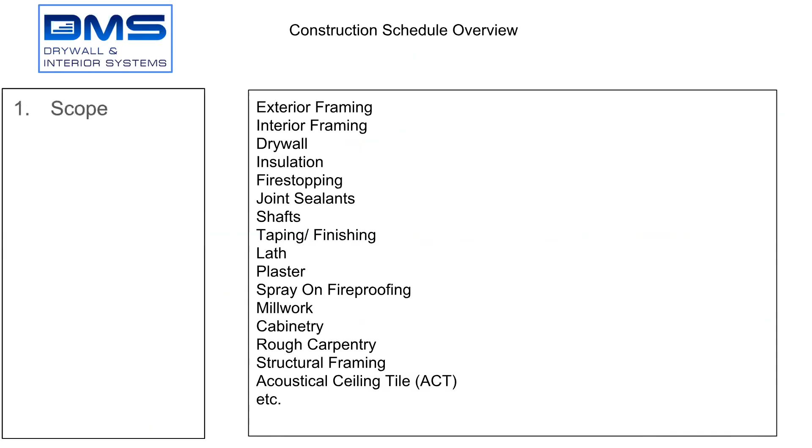So we're just focusing in on interior framing, drywall, taping, and finishing today. From there, everything else follows the same path, just some gets more elaborate. It all depends on the project, because each project's a little bit different. So first thing you look at is scope.

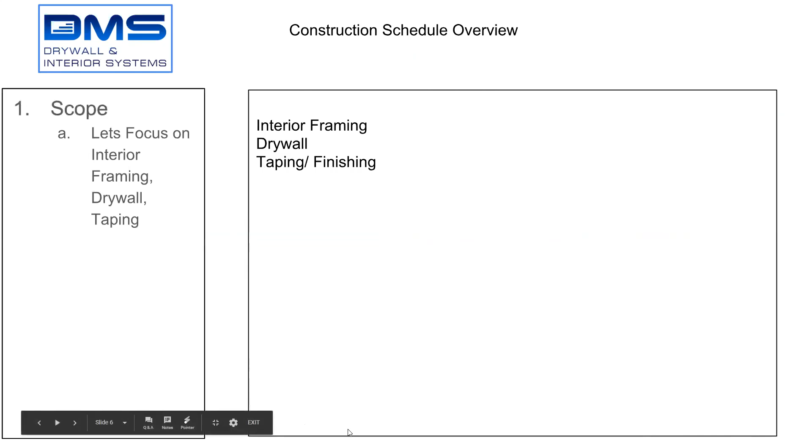Next piece you're going to look at on your project: how is your project broken down? How is it set up? Is there area or phasing in it? Are you going to go first floor, second floor, third floor, or are you going to go third floor and then come back down to 1 and 2?

In San Francisco, there's not a lot of extra area to lay down material, so we'll usually build from the second or third floor up and leave the bottom floor to get materials in, because there's nowhere to stick it. You use that area underneath, feed it up through, and then do that part last. So knowing how your building is going to be put together in sequence, or if there's areas or phasing, is important. In this example, CPMC Davies South Tower has a phasing plan.

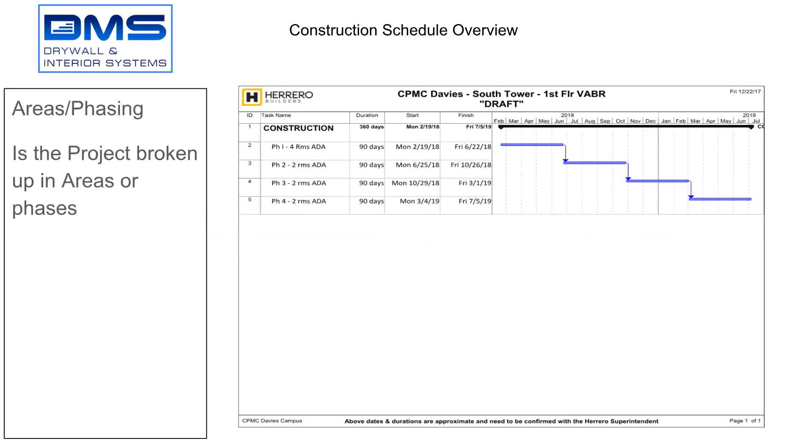So this gives you a visual representation of that. So it's like, okay, this is going to be phased out. It's not going to be done till July of 2019. That's also important to know in regards to the estimating aspect, as labor rates increase. So when you're bidding it, well, if I bid it here, the guys are going to get raises out in the field here, so you're going to have more costs, labor costs, material costs, and stuff in the future.

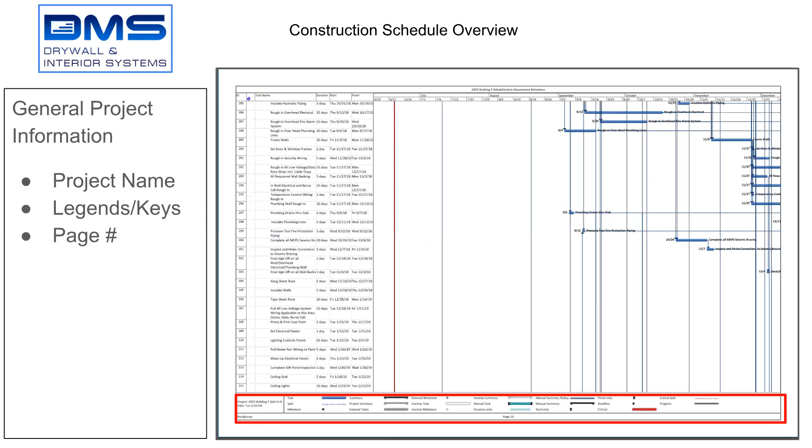Okay, so let's look at how a schedule looks. So here's an example of a schedule that I took. This is for Zuckerberg SF General. This is a preliminary schedule. Let's just look at the format of how it's set up. Usually down at the bottom part of a schedule, this usually has the project name, legends and keys, what all the different symbols and everything mean. Here's the project, usually has the date and what page number.

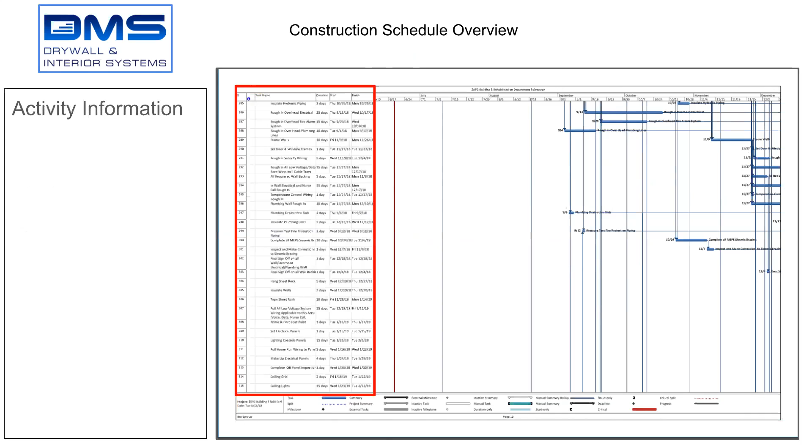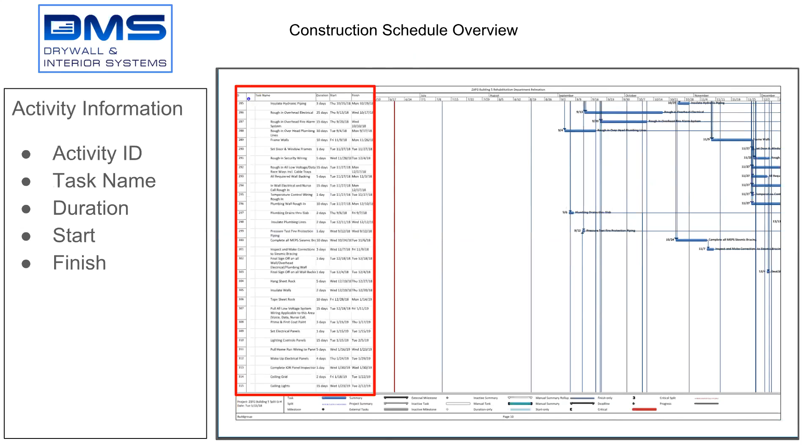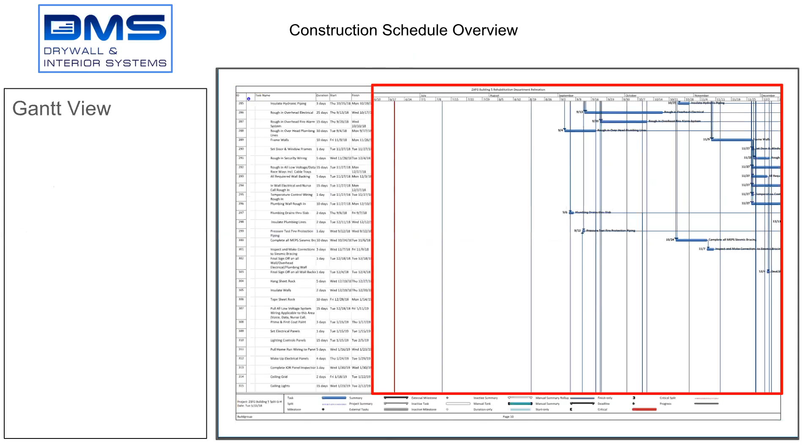This area here is the activity information. So this is where you actually want to be looking to understand when do I start, when do I finish, what's my sequence of activities, what's the duration, when does it finish, how does that look. And then over in this area, this is the Gantt view area, so all this information gets spread out and pushed over here, and it's represented as bars. So start, finish, duration, that gives you your bar.

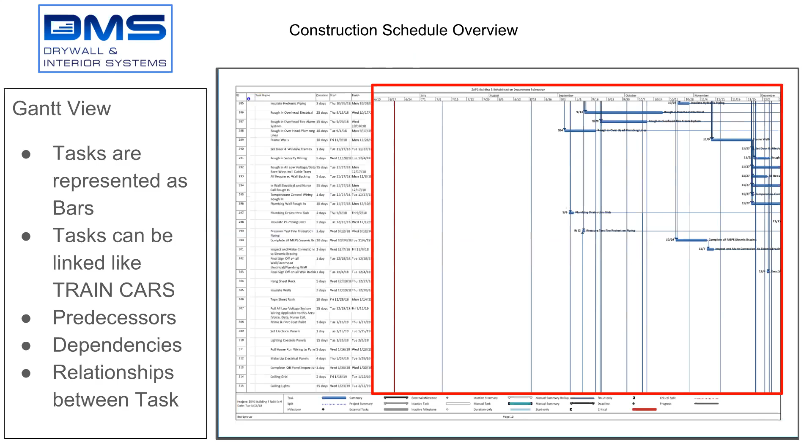And each task is usually linked. The tasks become linked like train cars. It's like, okay, this is going to happen on this floor, then this is going to happen on this floor, and usually this has to go before that, and then they'll link it so that way they can duplicate their schedule and have everything move and flow so that people have an understanding of how things are going to happen. And so whenever you deal with a certain task, you're going to have predecessors, and then there's dependencies, things that are underneath you, and then there's a relationship between the tasks. So let's take a look at relationships between the tasks.

Relationships between the tasks. In this example, you have two activities represented as bars here. The start in time is always the earliest date. The relationship between these 2 tasks is start to start. Meaning that on the schedule, they said, well, how do you want these 2 to be linked? Well, this is going to start, and then you can put what they refer to as a lag time in there and say, as soon as I start this, 5 days later, you can start. So it's a start to start relationship. I start, and 5 days later, you can start.

Now, it doesn't mean I'm finished. I can keep going on and on and on. But you can start after I start, because I have to get some work done out ahead of you, let's say. So it's a start to start relationship. Then there's a start to finish relationship. Okay, I'm going to start, and 10 days after I start, the next activity has to be finished by here.

So that means if this duration ever changes, look, I don't care when you start, but you have to be done by here, and I have to start this date, and this has to be done by this date. So you have different relationships that way. The second phase has to be finished by that date? This could be the phase or an activity. I'm trying to think of an example that I could give you to show you start to finish.

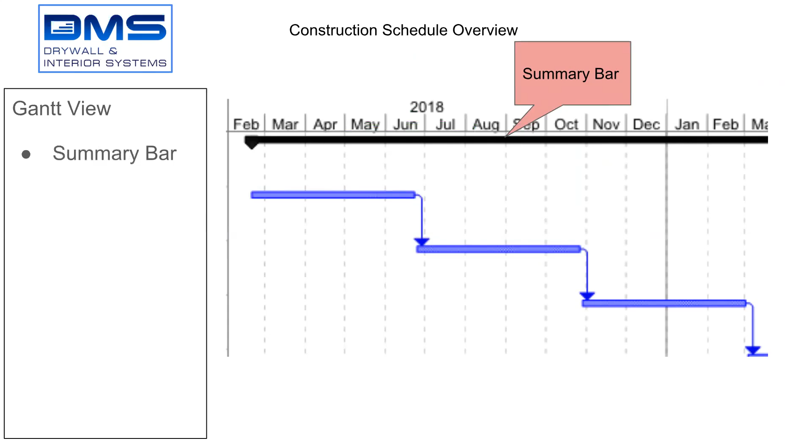Okay. On a Gantt chart, in the Gantt view, you're going to see this black bar. It's called the summary bar. The summary bar takes all the items that are below it in a certain set of activities, and it just has you look to see what it looks like when you put all of it together. Okay. So let's jump in and look at the activity information. So I blew this up to look at the activities. In this area, you're going to find, again, the activity ID, task name, duration, start, finish, and sequence.

Okay, for activity ID, schedules can be huge. I've dealt with 200-page schedules. They can be pretty massive. Every activity gets a label. So if I'm talking to a general contractor, I'm saying, hey, framing on the 3rd floor, they're like, activity ID number 289. They're like, okay, I know exactly where to go, and they can search for it that way.

The task name, here's the rub inside of construction. We have lots of different names for the exact same thing in different areas. So in this example, it says hang sheetrock. On other schedules, it'll say hang gypsum board. So if you're trying to search with sheetrock or gypsum board or drywall, all three are the exact same thing. Hang, install, rock walls, close-up walls, all are different names meaning the exact same activity.

So knowing your activity name and the way the general contractor is referring to it is going to be critical so you can keep your eye out on the schedule. And sometimes they interchange as they go through. Duration. So the duration is whenever you start and where you finish, that's how long your line is. This is a 3-day duration, 25-day duration, 15-day durations.

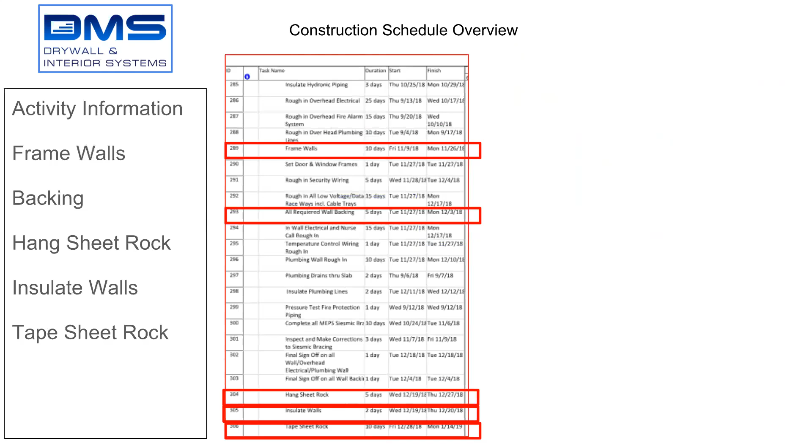The other thing to look at is in regards to durations, which I think is the next slide. I'm going to go further into the durations and what a common duration looks like in regards to the sequence of things. Okay, this is an overview of a master schedule. So there's a master schedule back here for ZSFG, and here's another master schedule for the Los Medanos project. Mm-hmm.

So you can get a sense of how they're doing their schedule by looking at it and saying, okay, how are they sequencing things? What's happening? And remember when I said there was that summary bar? Usually these are the headers or titles. The summary bars will tell you start to finish, your full duration. So this one's going to start here and finish here, but in all the activities, there's a whole dead space here, right? Nothing's happening, but this counts from beginning to the last activity.

They have some rain days, and this gives you a general sense of flow. Construction usually always flows in the same manner, productively, if it's new construction. If it's tenant improvement, meaning it's an existing building, that's where things change, because they may have to section off a certain area, build this first, then close it out, then go into that.

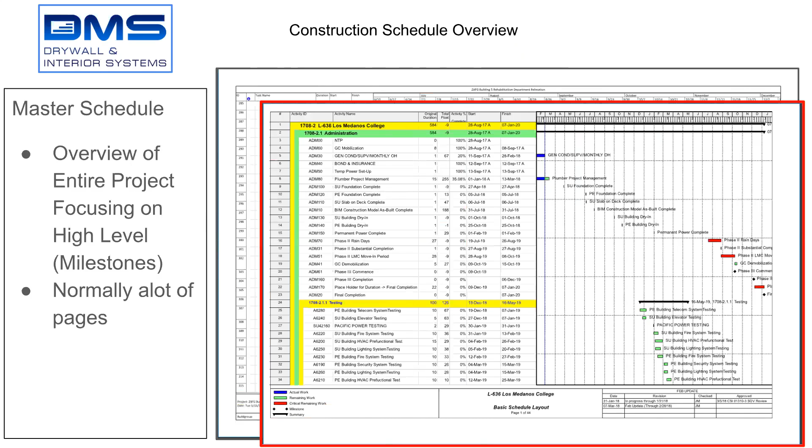So there's another type of schedule: 3-week look-ahead or rolling schedules. These are usually fewer pages because now you're zoomed in to what's actually happening in these 3 weeks. And there's a subcontractor meeting held every week to make sure that everybody's not working on top of each other and everybody's working safely. So for the projects you're managing, be in tune with where your foreman's at, whether he or she is attending the meetings, and what information is coming out of the meetings.

So we see a lot of this with Paul Elliott with SFO. We're going to be seeing a lot with Los Medanos. Like, how is this going to move and shift? These schedules can document things so that you can see, well, I was anticipating being done at this time, and now we're not. This is what you'll hear Schmidt refer to a lot in regards to delays. These help to say, here was the original plan, we have drifted far away from that plan, and there are cost implications because this has moved out so far.

These are usually distributed with the meeting minutes. So usually on every project there's a subcontractor meeting, and the general contractor has to distribute minutes: here's what we discussed, and here's what was agreed to, here's the plan. Project management looks through those notes and the schedule and identifies what we're trying to achieve. If something's not right, this is a spot where we get to respond, or at least let them know, hey, we don't think this is right. We have to notify them if there's any variance or discrepancy that we don't agree with.

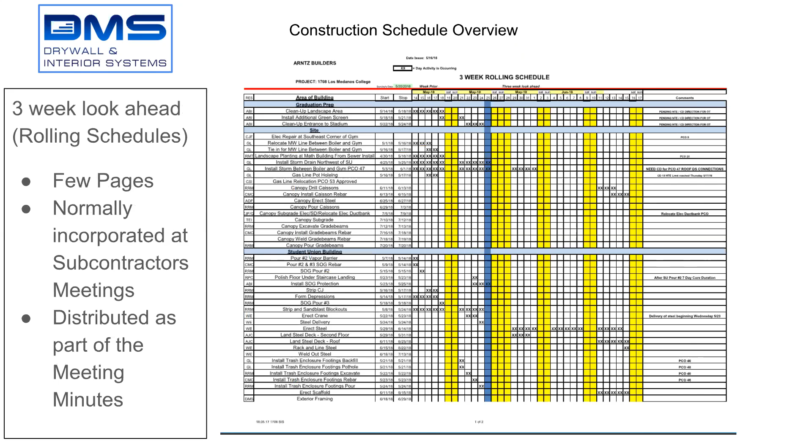So let's focus on the tasks that we normally perform. These are typical activity tasks for framing, drywall, and taping. If you're doing the exterior, it usually precedes interior.

First thing that you do is layout. You go out, snap, check lines, get everything measured out.

Then the next is top track and clips. Top track is the top piece up, but if you need to put an additional piece in there to have it sit and attach to the structural steel, that's the clips. Top track and clips, you'll see it down here too. Then they'll do infill framing, which sometimes is labeled on schedules just as frame walls.

There's usually a big gap between top track and infill framing. We usually go put top track, and if the beams get fireproofed, we top track, then they get fireproofed, then mechanical, electrical, fire sprinklers do a bunch of work overhead. Then they call us like a month later and say, okay, now come in and frame the walls. And we'll come in and frame the walls.

Frame the walls, then we'll Dens-glass the wall. Once it's framed, everybody gets their stuff in. Then we put Dens-glass on one side of the wall.

Then you'll deal with what they refer to as the skin of the building, or the cladding of the building. You're going to deal with waterproofing, glazing, lath and plaster, EIFS, stone, metal - any part of the building. You look at any of the buildings around here and say, okay, that went on, and then there's a whole other set of activities that go on.

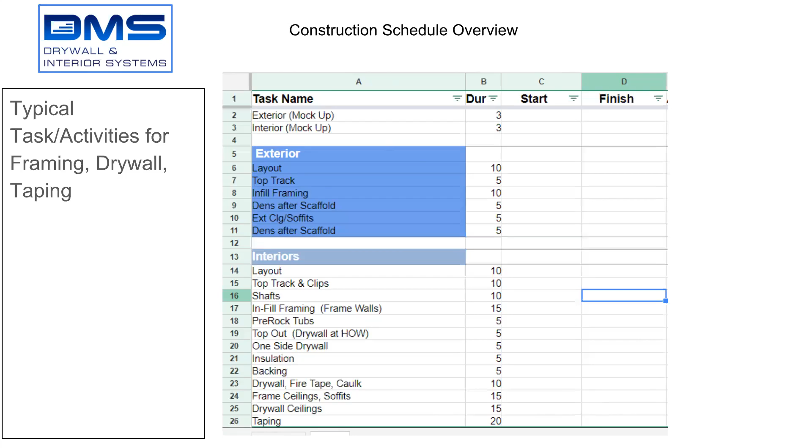Okay, now this is the part we're putting it to work. I'm going to show you what I've set up for us to do, and then we're going to take some time to actually go do it.

So I've created a project schedule template. I got this from someone that works in construction who set up an Excel sheet to create a Gantt view and do very robust calculations. I'm just trying to look for our activities, our starts, and when you put in the duration, it will plan this out and put it on the calendar this way. I'll show you what that looks like when you do it.

So this template, you guys are going to go grab it. You can make a copy of it, name it whatever your project name is. You'd say, here's my guide dogs schedule, or one of your projects - Davies Tower, you could do that schedule. You could pick Zuckerberg or any other to plug in and start doing it.

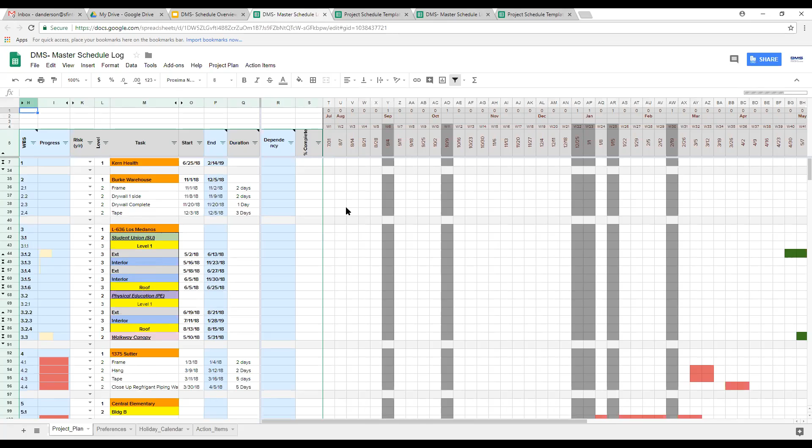And they put in, this starts here, and there's usually a calculation duration - still maybe trying to calculate, as you see up here, just trying to pull that information in. When it does, all I did was say, this is Los Medanos, underneath that I have these two buildings, underneath that I have level 1, exterior of level 1, interior of level 1, and then physical education.

These get truncated and hidden - you see over here with these little arrows? If I click those and open it up, this will expand to show you more of what's happening. That's why we're not seeing durations, because these are the header pieces, kind of like a summary bar.

So in this case, I can show you here. Click here, it opens it up. Here's the activities.

Interior, frame west, frame east, frame soffits, drywall one side, drywall complete, and tape. These all have 15-day durations. This is when they start.

So today is 5/16. We're supposed to start on the interior of level 1 of the student union building. This is all from the master schedule, which is the big picture view. So now this needs to be updated to say when we're actually going to do it, but I'm using it to give me a sense of time. When does this activity anticipated to end?

So we're supposed to start framing the beginning of May here. And I try to look to see these two are starting at the same time. How can I start on the east and west at the same time? Oh, I have to have two crews. I have to have people over here and people over here.

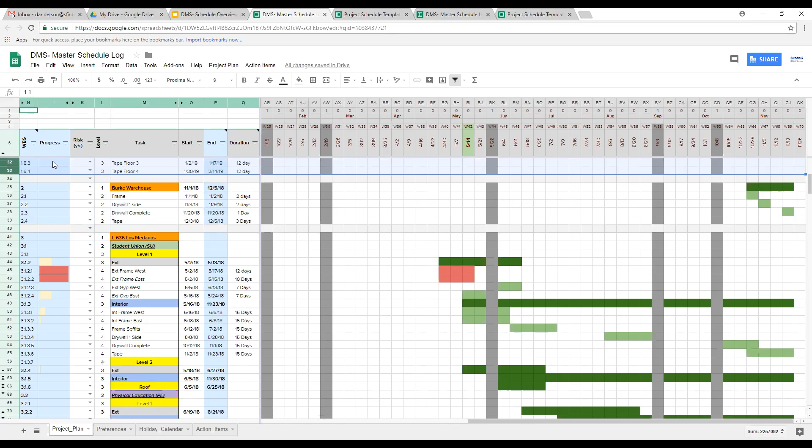But if you just practice and start to get familiar with what is the schedule trying to show me and tell me, is there any big flags? You start to look for it, you'll see it. In regards to Kern Health, when I did this with Chelsea, the plaster scope is $2 million worth of work right here. This is $2 million worth of work.

It's going to happen from, I'm going to call it, July, August, September, October, all the way to end of November. So you got $2 million happening in 4 months. It's like, okay, that's $500,000 a month. And most of this isn't us. It's our sub. It's like, okay, $2 million.

Schmidt, you're going to pull out a $2 million check and pay them? And we're asking for the money to come in, and we're making a certain percentage on that. That's why it's like, wait, how is this going to cash flow in order to do this? So step one, grab your templates, upload, create one for each of your projects, then copy, and we'll paste them into here. I've already created some, so this is the part where you'll look and see, is mine in here? Do I need to update?

What's that looking at? Do I have a sense of flow? I went and did Central, and here's Central, and this example would be here Central. These are all past, because we're here right now. This is the week that we're in. This is kind of the flow, and you'll see a pattern. Oh, this is going to go this way. This is going to go this way. And this is going to go. And now we should be starting down here on building C.

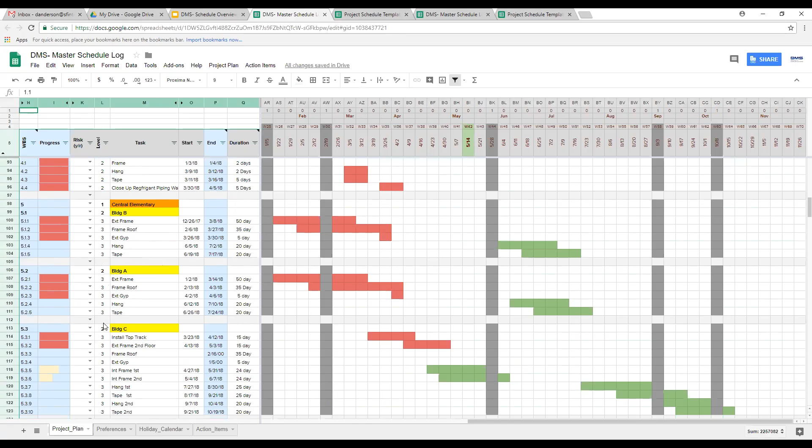But as we all know, per the one meeting, he's saying, look, we need to be doing some framing. We can't frame on the first floor. This was supposed to happen a month ago. So the schedule has slipped, which is why you wrote the delay notice saying, hey, the schedule slipped and we are behind. Okay, then the third component is when you've got a sense of your schedule, you come here.

So now that we have a sense of the schedule, who else needs to know about the schedule? If everybody here in the office knows about the schedule, who's the critical person that needs to know about the schedule? Say again? In the field, that's right. Who's in charge of the field? Dave Legier. So he needs to be able to see all the projects because he doesn't know when they start and stop. So I created a simple version of the project schedules and manpower forecast.

If you know your project, when it starts and stops, you can come in here and put in your estimated start, estimated stop, and the duration. You just plug in these three numbers, which is different than the other Excel. So you put it in here, and you'll have to pick and say, well, when's that going to happen? When's it going to start? January, February, March. Again, this is rough. So this is not meant to be exact.

But what this sheet does is that for each one of your projects, you say, well, this is when it's going to start, this is when it's going to end, or with Davies South Tower, I don't see it on here. But if it did, you'd have a chunk here, chunk here, chunk here, and a chunk here, or a bar of activities here, here, and here, because there's four phases. And you would put the amount of manpower you need.

Now, the question will then arise, well, how much manpower should I allocate for it? Anytime our guys are out in the field, they usually are 2 people. So they always work in crews. So the minimum is you can put 2 across the board. And then as we look at the activities, when you go, okay, well, when do I get into framing? You're like, look, our guys mostly operate with 2 to 4 man crews.

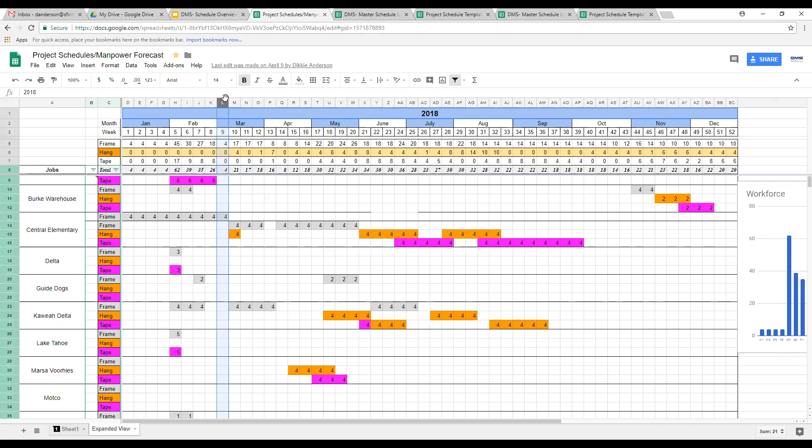Sheet 1 is a more simplified version because you don't have to designate between framers, hangers, and tapers. I was used to dealing with large crews where I'm like, I got 10 guys on that team, 10 guys on that team. What are the drywallers doing different than the framer? Framers are usually up further in the building. Drywallers come behind them, and then tapers come behind them.

Here, our company, we're one-stop shop. We're kind of doing it all. And so because we're doing it all, it's like, oh, I don't have to worry about trying to manage different teams. I go, okay, look, there's enough. If you get done framing, run downstairs, do drywall. When you get done with drywall, jump on the taping, and they can fill it in. So I just put it all as just framers or carpenters. They say, oh, you got 4 guys working for this long.

So I work with Dave Legier on this and say, well, where's this actually at? And this is where I can get him to train us, saying, how do you plan this? Let me get into your mindset of how do you spread that? This job's going, that job's going. CMD, which is now $7 million, current $6 million. When's that going to happen? When are these activities going to go on? So he can forecast, and his ability to now see, where am I going to put men?

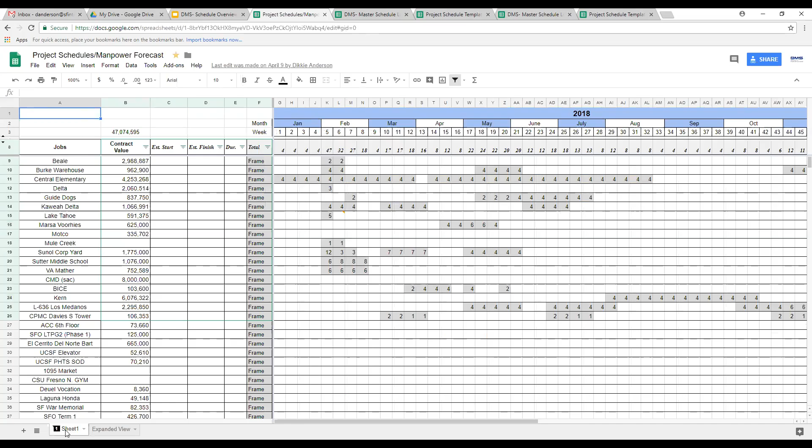So can you see, when you look at your schedules, creating your schedule gives visibility to us, gives visibility to finance, gives visibility to Schmidt, gives visibility to Dave Legier, and it gives ability to estimators to go, okay, look, where are we at as a company, where are we spiking, and where are we going to go low. Schedule is critical to look to see what's going on. So this is what the scheduling is all about.

Back to my presentation. See if I skipped it. So what you will do is, once you get a sense of your schedule of your project, because we're about to do that for like 10, 15 minutes, we'll break out. Go grab a project. We'll work through it. I'll answer any questions you got, identifying your scopes activities, breaking down your project, and then updating each one of these sheets.

I've shared all these sheets with you, so you'll just need to know the names of them. Go, okay, I got to take the schedule template. I need to make my own. Then from there, I need to update from the schedule template into the master, DMS master schedule. So this is the part where your individual project, you go, I have to give this to the team so we can get an overview of the whole company. Oh, here's the whole company, the master schedule, to see everything that's going on in the company.

From there, I need to jump in and I need to let the field know, which is the manpower forecast. Oh, hey, look, you're not even going to start till July. Helps them know. That's what Dave Legier keeps getting blindsided by with all these projects. Going, it starts tomorrow. What's the scope? That's why I've been doing project notifications. Hey, this is when the job's anticipated to start. Here's what's going on. So we all have some visibility. Okay? Let's see what's next.

Next, when we come back, we'll get into pull planning. And we'll do a demonstration of how pull planning works. Okay?

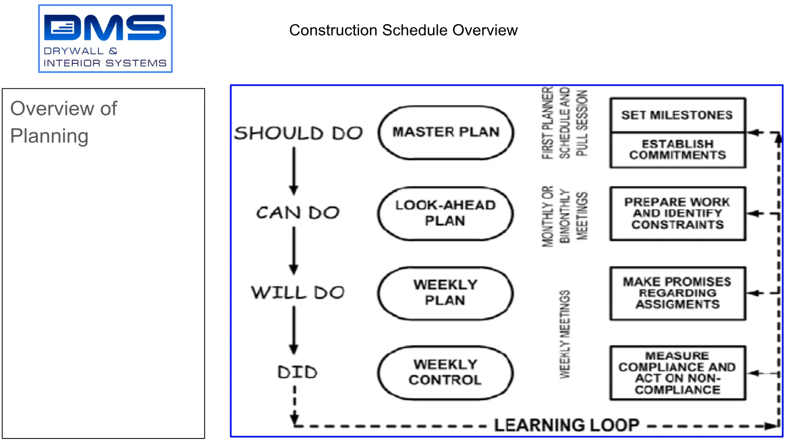The last planner system, as you saw in the previous slide, these are the first planners. So who are the last planners? The last planners are the people that are actually doing the work. And so that's where you want the input, because that's where the rubber meets the road, when we're actually building stuff, to be successful or not.

So the last planner system incorporates lean into construction planning with a collaborative approach between planners and site foremen. So this is the office and the field coming together to go, how are we actually going to do this? This is the strategy and what can be done and not done based upon resources and constraints. So as you see here, the master schedule, set milestone key dates.

This is the should do phase, can do, and the make ready work. Then you get into your weekly work plan. You do progress tracking, and then the cycle just keeps continuing over and over, and this keeps feeding down into it. So this last planner system is part of the lean construction lingo, so you'll hear it that way, but other people are using it. So you'll see it like this.

Remember I said here's your milestones. We're going to create milestones, and then you begin to work backwards. You go, okay, here's my milestones. What needs to happen before that? So here's the milestones with activities before it and how they're related to each other. And then make ready planning is you actually put it on and go, well, this is week 1, week 2, week 3, week 4. So all this was just concept, and you kind of put it in an ordered sequence. This is where you're actually putting time to it.

And then from there, you get a weekly work plan, which is where you're Monday through Friday. So you're zoomed in even more. This is a week view into what activity is actually happening. And then your commitment management. Is it complete, not complete, or ongoing?

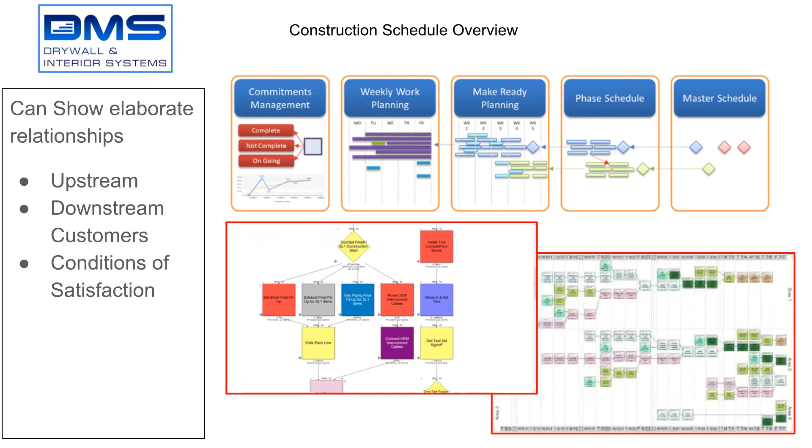So let's try pull planning. Let me show you this video first. We'll actually do pull planning. Let's see if it clicks here.

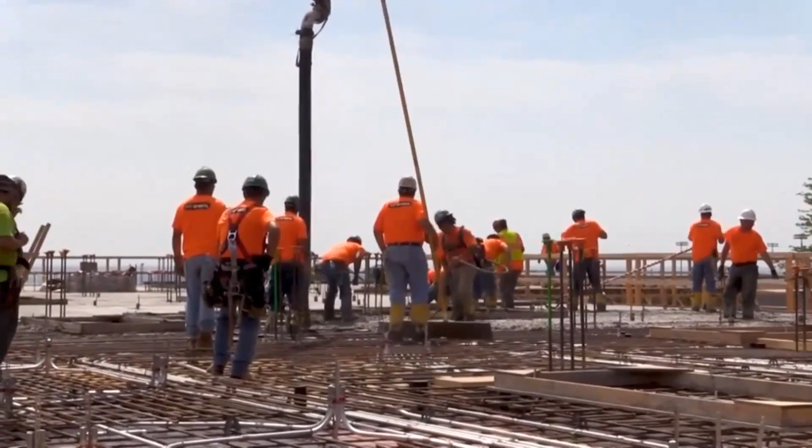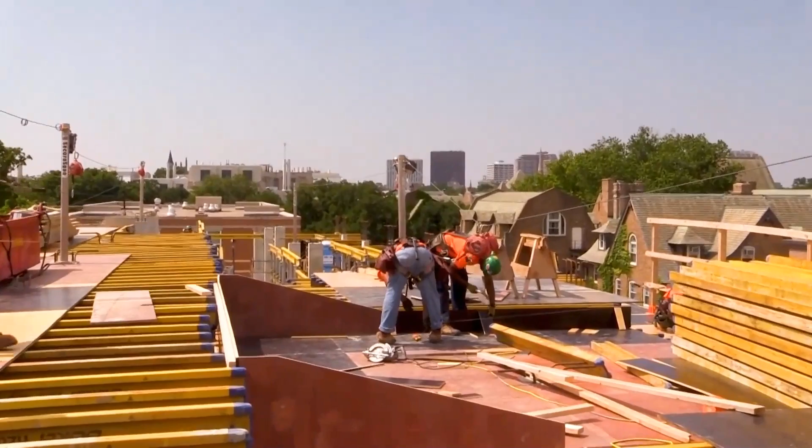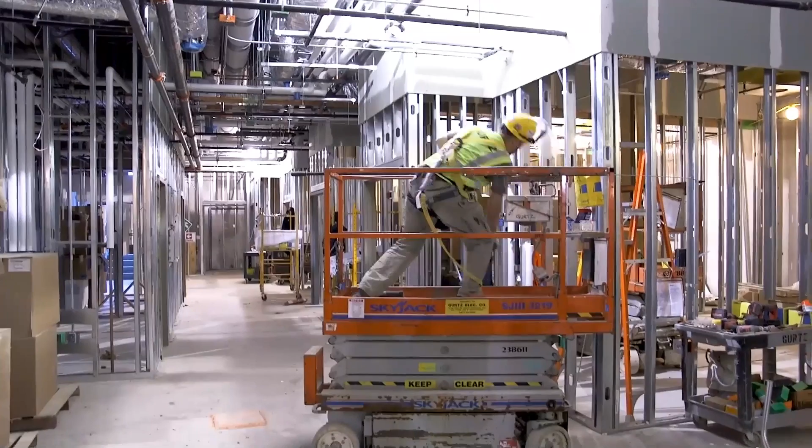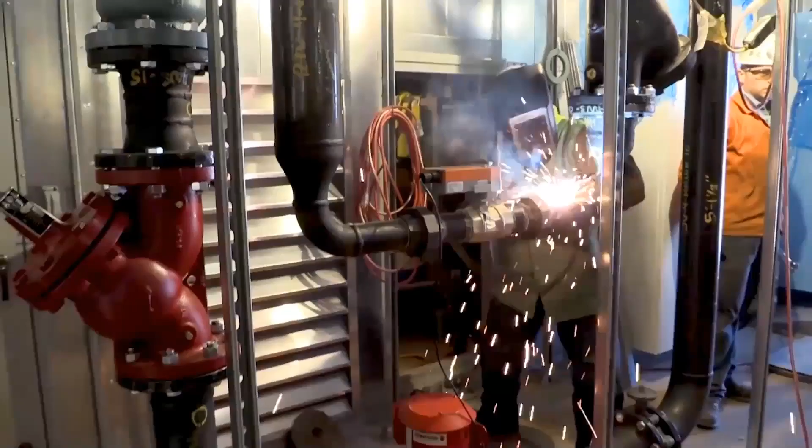At the beginning of the project, everyone signed off on the schedule. The money was there, it didn't rain, the materials were delivered. Every day was accounted for. So you should have finished on time and made the money you expected to make, right? So what happened? On a typical construction project, the handoff of work often isn't reliable and flow of production is not steady. The dates and durations of the schedule are determined by a few people who aren't involved with the day-to-day tasks. Your team needs to consider the handoff of work, information and materials, your resources, far enough upstream to identify and eliminate issues that interrupt workflow or stop the job. Phase pull planning, part of the Last Planner System, guides the people who do the work to plan the work. Rich Seiler of Unified Works explains the process.

To kick off the implementation of the Last Planner System, we start with phase pull planning. This is where we take a target condition out into the future, typically somewhere between 12 and 16 weeks, and we take it off the master schedule. The team decides this is what we're going to shoot at, and we put that up as our target. We actually work our way back. This is all the work that we absolutely should do in order to meet our contract obligations. We have our master schedule, which everybody has in their contract. Now we take a chunk of that at a time, small batches at a time, and we actually pull that back to determine what the team actually thinks it's going to take to get that work done. And this pattern of phase pull planning is repeated as necessary for each phase of work or target condition. First, we plan. Then we do what was planned. Then we check the work to make sure it went according to plan.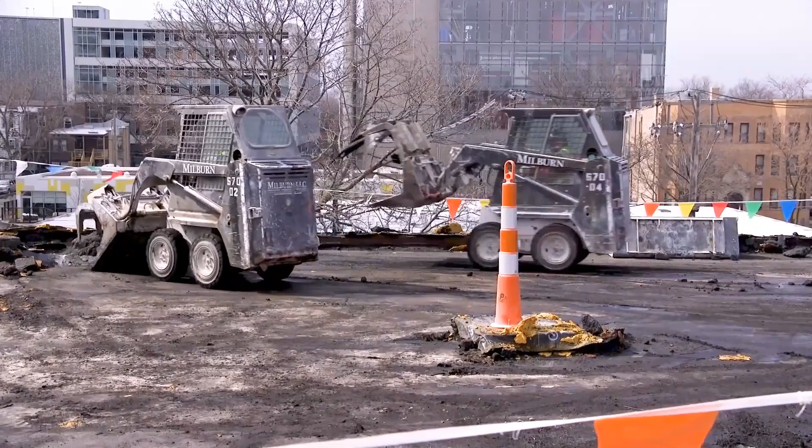We make sure that for every phase, the work we said should be completed was completed. And if not, we act to assess why. The continuous, detailed review of planned and completed work creates opportunities to eliminate waste and add value, the two key principles of the lean construction process.

So what are the benefits of doing a phase pull plan for your project? Phase pull planning identifies and removes constraints that block work from being completed as scheduled, promotes the efficient handoff of work, eliminates rework and surprises, makes everyone accountable for not just their work, but for the overall project, eliminates unnecessary stress on the job site, allows everyone to make the money they planned for.

So what does it take to have a successful phase pull session? A couple key components is you need to have all the people in the room that are involved in the project for that particular planning horizon. Everybody has to be there prepared to go to work. They have to have an understanding of the project. It should take some time to prepare for the phase or the milestone or the target condition that we're going to be examining. All people have to come to the room prepared with an open mind.

Also, to do something differently, to be collaborative, to provide input. We're looking for people to say the difficult things that we tend not to say. We're trying to open dialogue and get everybody moving in the same direction. We need a good facilitator, somebody that can help keep the process moving, somebody that understands the process. That's very important that we have somebody there, some coaching. It comes through coach repetition until such time as the team can kind of be self-performing.

The benefits that you could quickly expect to get out of a phase pull plan is you'll find quickly that the team starts to talk. The team starts to understand that we're all in this together. It isn't you against me, it's not an adversarial scenario, but we're all in this together, and really starts to look at the project as a whole as opposed to individual contracts or individual scopes of work.

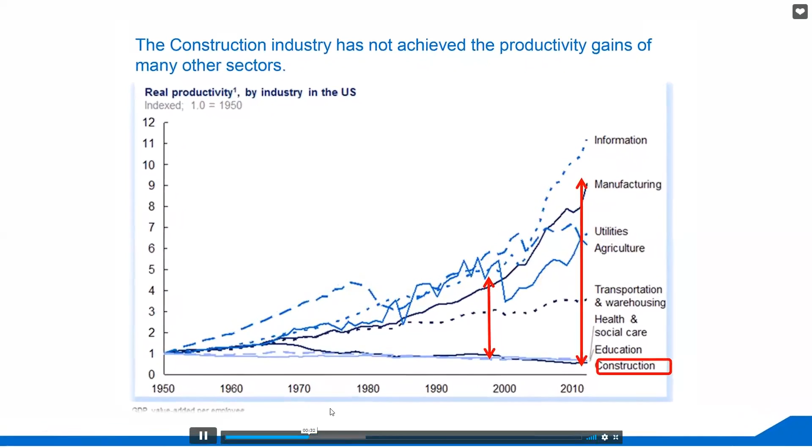So I'm pausing this for a reason. They've tracked from 1950 to 2010, to where we're currently at. The labor statistics track this. This is how productive we were in 1950. We had limited resources. And as industrialization came along, the information age changed things, and it started to peak. Now it's spiking up here.

Manufacturing has improved. Utilities and agriculture have improved over the years. Transportation and warehousing has gradually been improving. Health and social, education. Here's construction. In the 1960s and 70s, there's a big industrial boom, doing more. They were improving the processes and then stagnating. This is where construction's at. And they've done studies upon studies of different industries and said, if you stay here, you become obsolete.

That's why they're building modular homes and robots are building stuff. There's so much going on. Look, the construction industry is going to take a huge hit if we don't start moving to improve this, to become better at our productivity, our reliability. Because people go, why am I buying from you? I'll just go get the robots to do it.

And you can see where education's at. Our education has not improved. It's stabilized over the years. It's the same education from the 1950s. There's something big brewing in regards to this.

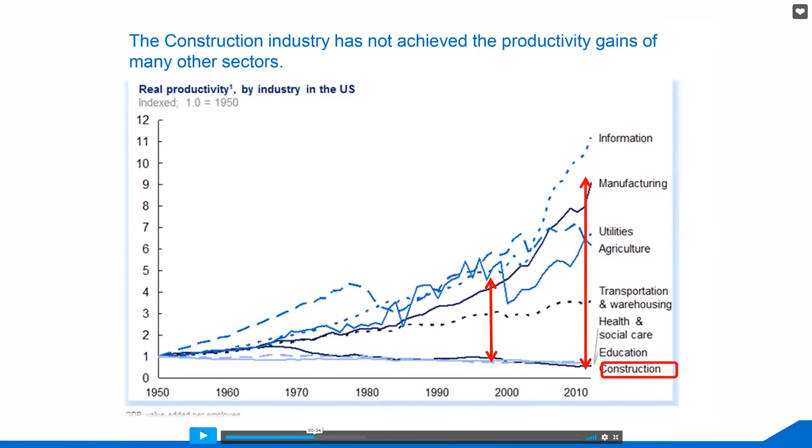Major industries. We advocate the use of a variety of tools and techniques geared towards making construction projects more collaborative and better able to meet the needs of the owners who contract for them.

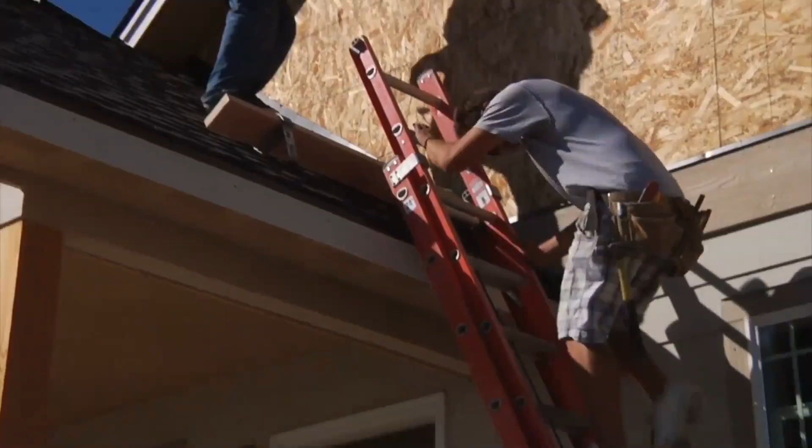But this is not just some touchy-feely, toolbox-based approach to getting people to work together in harmony. Far from it. It's actually grounded in the scientific method of plan, do, check, adjust, and in a basic understanding of human nature and how teams can work together better to identify and eliminate waste and enhance value for owners.

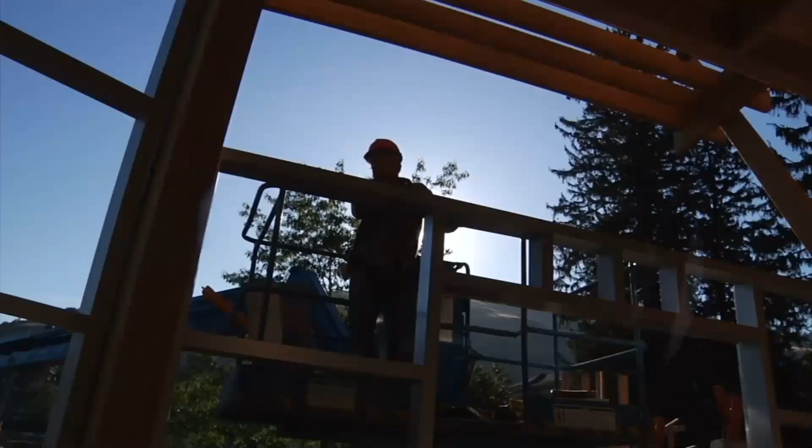Judging from the growth in our membership and programs in just the last 3 years, we're seeing more and more design and construction firms and owner organizations turning to lean construction as a way to break the cycle of productivity decline while enhancing safety and unlocking value in projects.

I'm here to announce the kickoff of a video series we've developed in which you will hear from a variety of organizations who've embraced lean on their projects. They will talk about some of the key lean techniques, how they benefit project participants, and how you can learn more as you consider embarking on your own lean journey.

LCI offers a variety of programs, publications, and very practical help that we make available through our conferences, meetings, and webinars. We also have a network of communities of practice that serve as chapters across the country in major construction markets. And you can take advantage of their expertise, whether you belong to LCI or not.

So let me encourage you to come and learn with us, hear from your peers about their lean journeys, and see if lean design and construction can transform your projects, as it has hundreds of others across the country and literally around the globe. Thanks for listening.